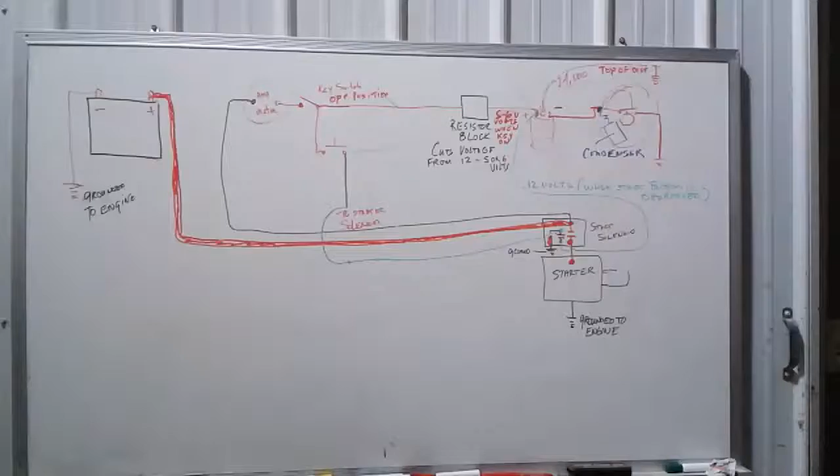Okay guys, I've got your electrical system drawn on the board here: battery, your start solenoid, your starter, your distributor, the coil, a resistor block, your key switch, your push button switch, and your amp meter.

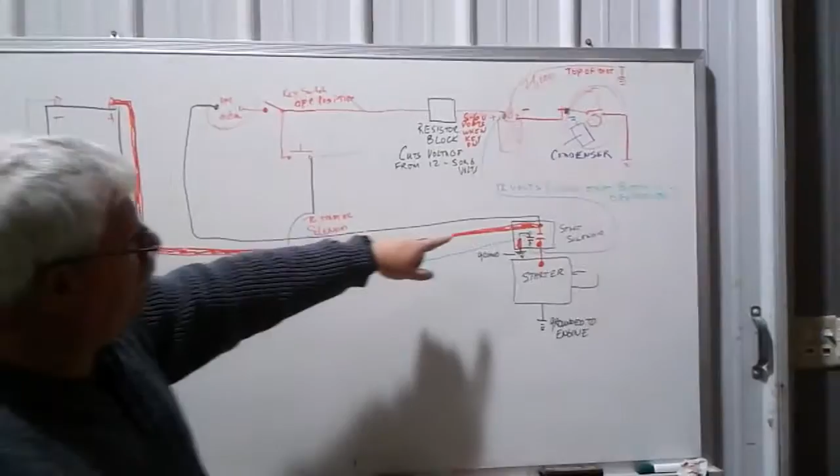So the first thing that happens from the battery: you've got your big cable that goes all the way to the start solenoid. No news there, I'm sure you know that. Then a wire comes back from the start solenoid and goes to the amp meter. From the amp meter it goes to the key switch, and from the key switch it jumpers over to the push button for the starter.

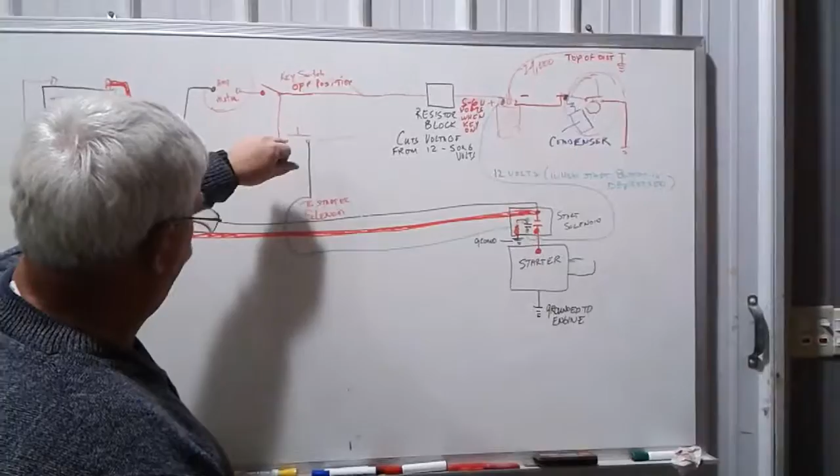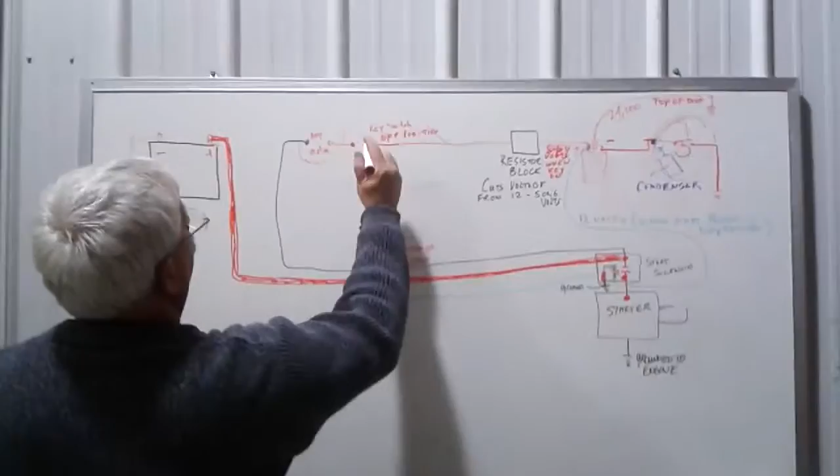So when you turn your key switch on, right here, we close that switch, power goes to a resistor block which cuts the voltage down from 12 to about 5 or 6 volts. That puts 5 or 6 volts on the coil here.

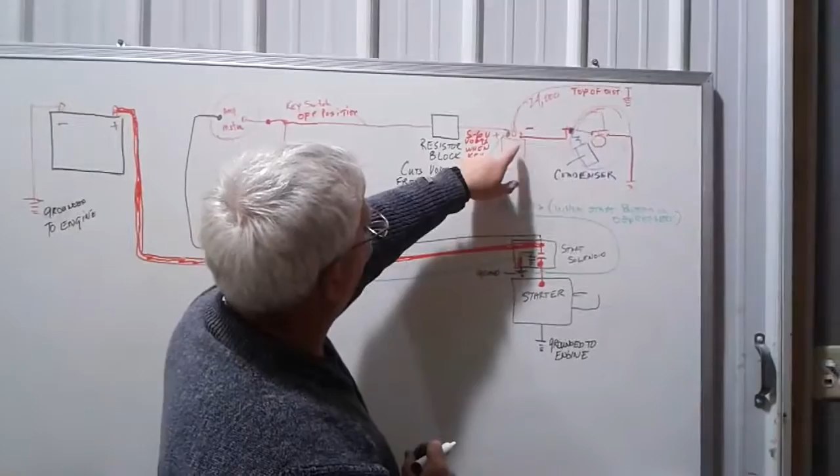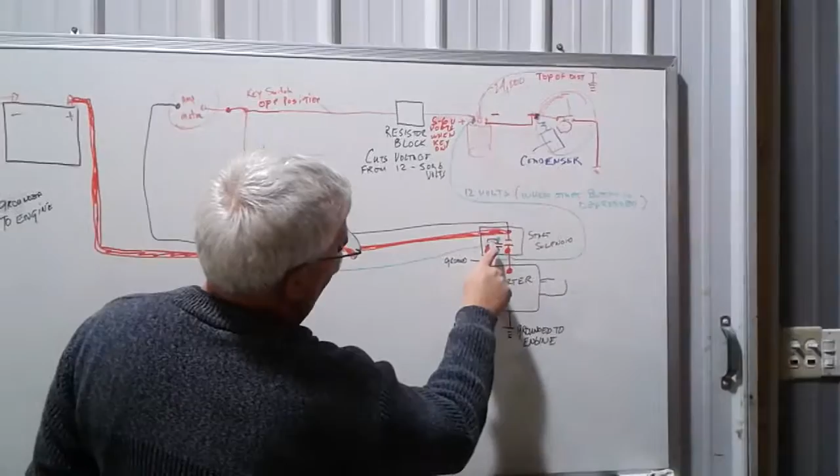And then you mash the push button and that engages your start solenoid. Inside the start solenoid you have the big set of contacts which goes to the starter and fires up the starter, and that starts rotating the engine. You also have a small set of contacts in there, so this green wire that goes to the start solenoid, there's also another wire that runs up here to the coil.

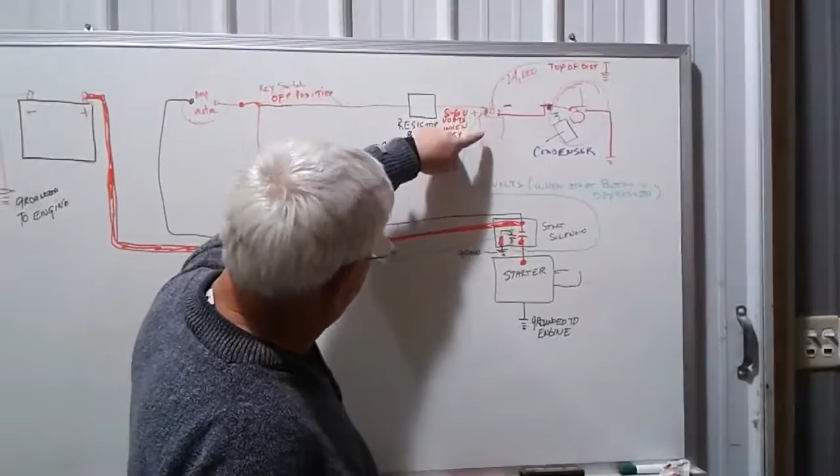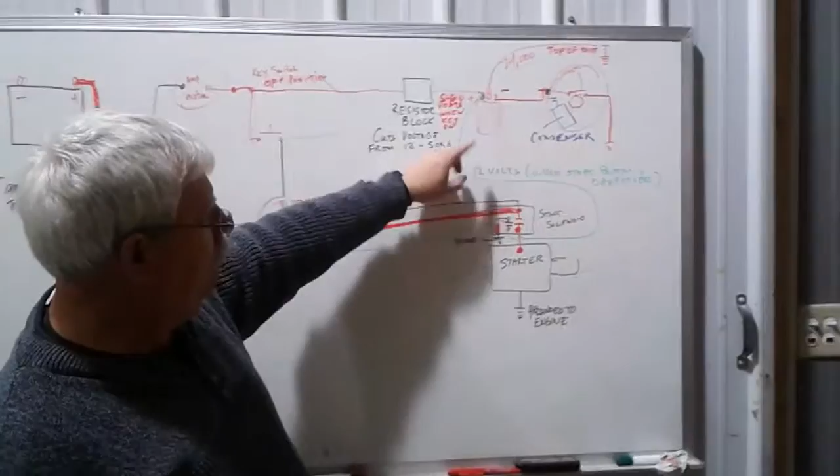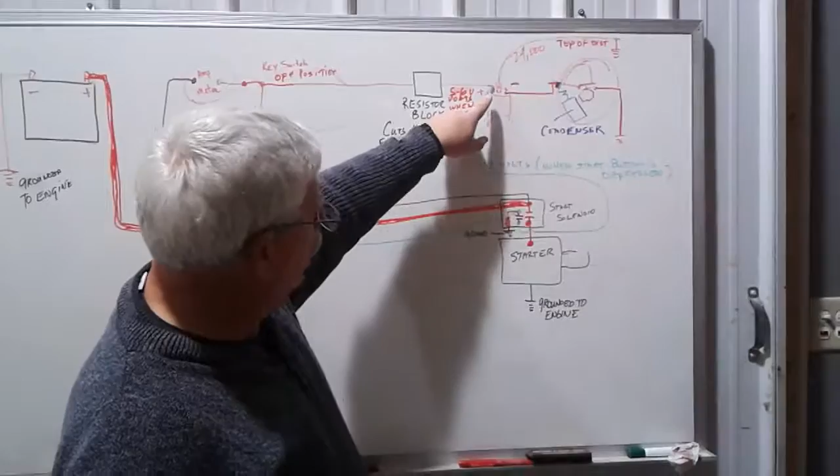What that does is give that coil 12 volts when you've got this button pushed. That gives you a hotter spark - twice as hot a spark with 12 volts up here as you do with the 5 to 6 volts. Once you've got your engine started and you let go of your start button, of course this voltage drops off to nothing, and you've got 6 volts, 5 to 6 volts, on your coil.

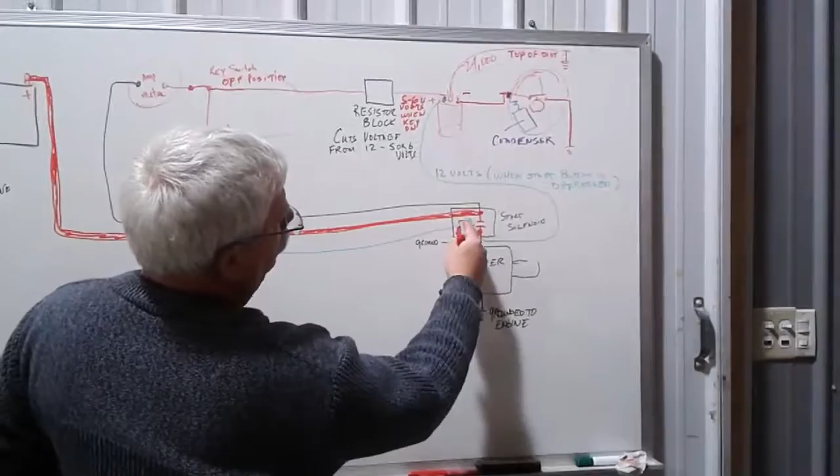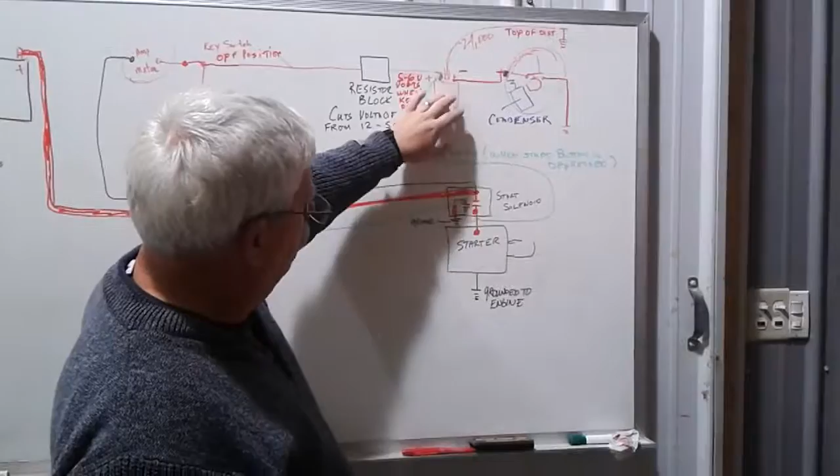So one of the things that could be burning your points up is that you're running with 12 volts all the time. This thing, while I was down there, this guy right here is stuck on. So if you run at 12 volts all the time, what happens is all this runs hot out here - your coil will run hot and it'll quit sparking. It'll run 15-20 minutes and stop, and then it'll burn up your points.

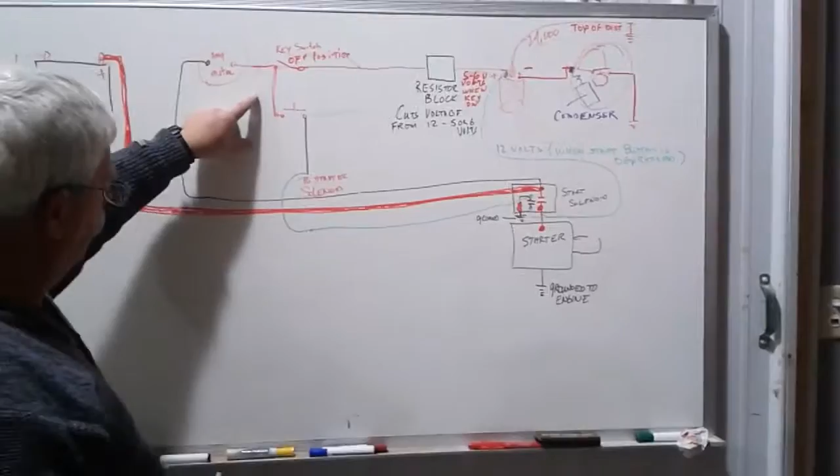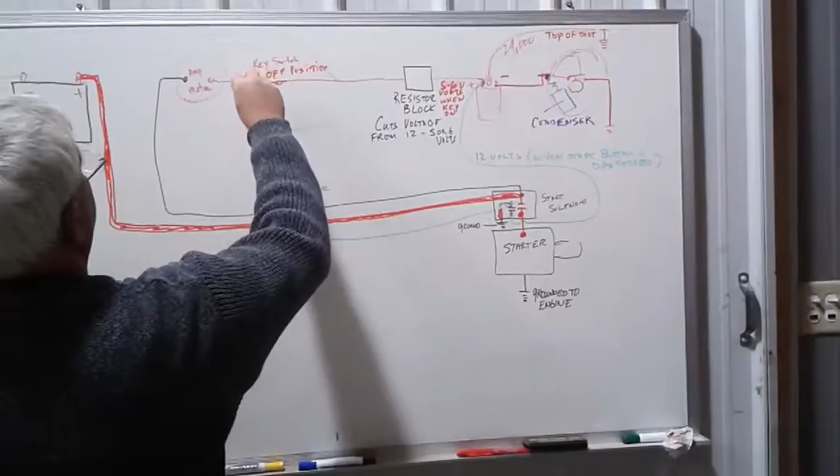So the other thing that could be burning up the points - I can't remember right here which way I wired this. There are 2 ways you can wire it. I can put my start button out here, or my key switch out here, and I could be hot to my start button all the time, which means now you'll be able to shut your engine off though. So you probably are not wired this way - you're probably wired where your key switch has got to be on for your start button to do any good.